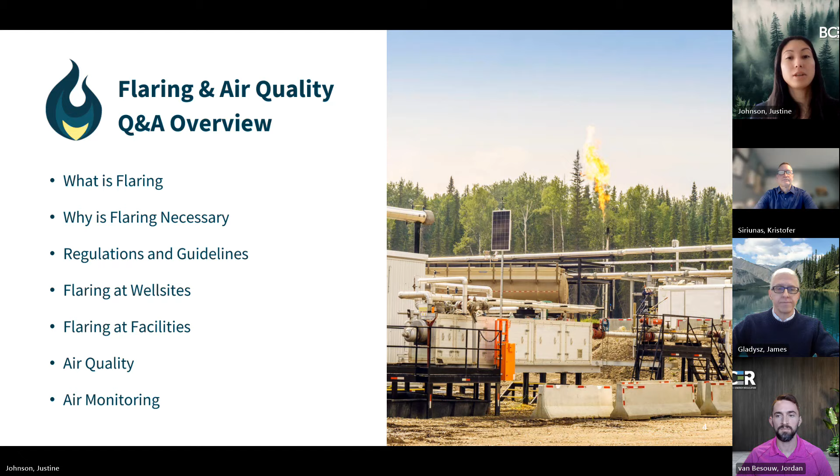So to get us started, the first question is, what is flaring? So flaring is just the controlled burning of a waste gas stream that cannot be processed or otherwise sold or used. It typically ends up as a result of non-routine situations such as maintenance activities or process upsets at a well or facility. The waste gas is ignited at the end of a long metal pipe with engineered components known as the flare stack. And it's this ignition at the end of the flare stack that causes the characteristic flame that is associated with flaring.

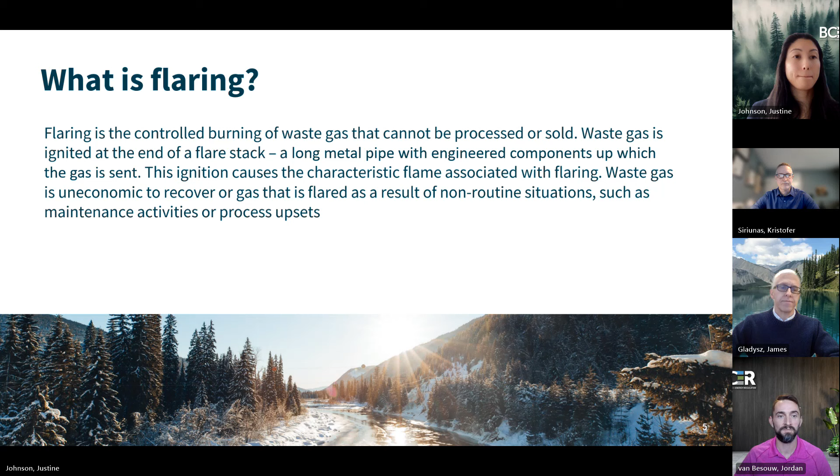And why is flaring necessary? Fundamentally, it's a safety measure. It's used to dispose of a waste gas stream at a facility if there's a facility upset, as one example, and doing this prevents a situation from turning into a bona fide emergency. It's also better than releasing the gas to the atmosphere directly, known as venting, because it results in fewer greenhouse gas emissions and reduced pollution compared to venting. Fundamentally, it's a safe way to destruct natural gas and other hydrocarbons at well and facility sites.

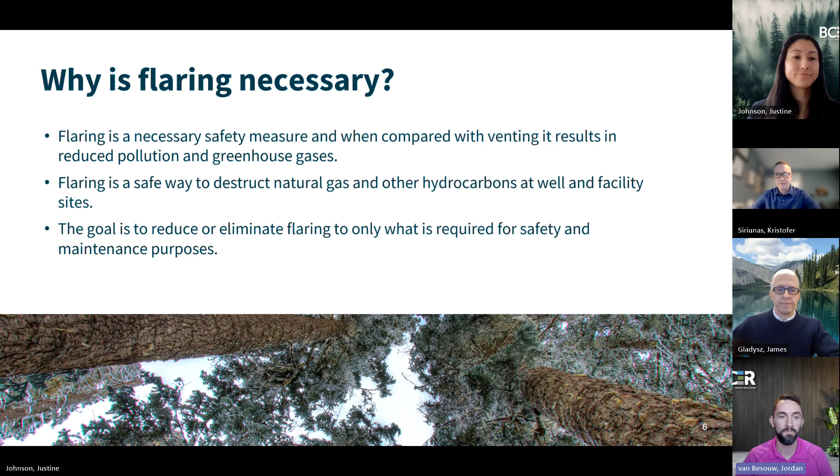How does the BCER regulate flaring emissions? The BCER regulates the entire life cycle of oil and gas, methanol, hydrogen, and geothermal activities through the Energy Resource Activities Act. There are a number of regulations under ERAA that document the requirements for flaring. The Drilling and Production Regulation is for wells and includes drilling, completions, and operations. The Oil and Gas Processing Facilities Regulation is for gas plants, refineries, and manufacturing plants that convert natural gas to other products. The Liquefied Natural Gas Facility Regulation is for LNG facilities for both domestic and export-based projects.

For larger projects, such as LNG plants, gas plants, compressor stations, there is a specified enactment in ERAA that gives the BCER authority to grant waste discharge authorizations or permits under the Environmental Management Act. If a flare stack was authorized under an EMA permit, then the BCER can impose conditions on flaring, such as restrictions on flow rates and emissions, and reporting requirements.

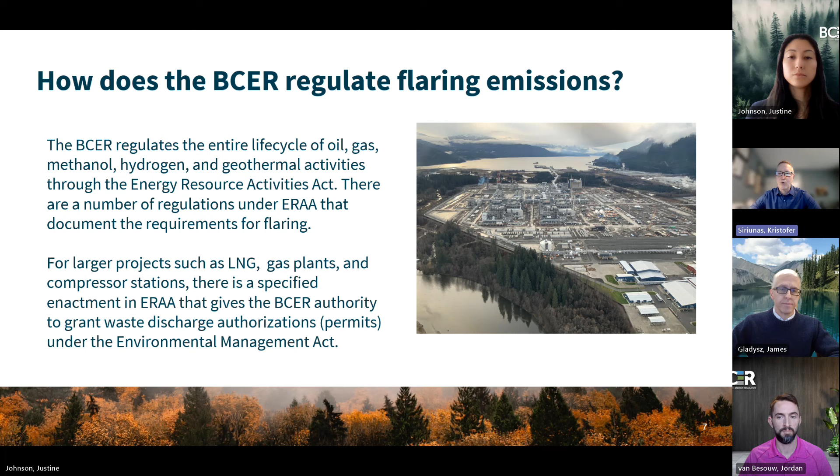Are there requirements in place to ensure flaring is done safely? Yes, in BC, we have a number of requirements in place to ensure flaring is carried out in a safe manner. First of all, the flare system design and operations are required to have adequate oversight by a professional engineer registered with Engineers and Geoscientists BC. Second, industry is accountable to have trained personnel regularly monitor ongoing flaring activities to ensure compliance with regulations. These requirements, combined with risk-based BCER site inspections and facility integrity management audits, provide a level of safety related to flaring.

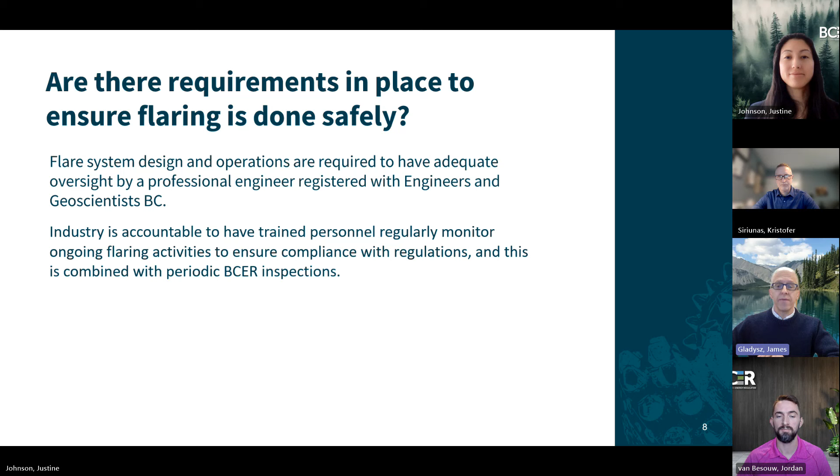The BCER also issues site-specific air discharge permits under the Environmental Management Act for large oil and gas and liquefied natural gas facility operations. Each permit contains requirements for limiting the release of air contaminants such as sulfur dioxide, nitrogen oxides, and carbon monoxide. Requirements to limit air contaminants for smaller operations are specified in the Oil and Gas Waste Regulation and the Drilling and Production Regulation.

And what resources are available for industry? Yes, Chris listed the various regulations in a previous slide that apply to activities where flaring may take place. We also have a dedicated published guideline on our website called the Flaring and Venting Reduction Guideline that describes in detail the regulatory requirements for all types of flaring and how those requirements can be met. There are decision trees within the guideline outlining when flaring is appropriate and where other measures to conserve natural gas are to be taken.

When can permit holders flare at a well? It's a good question. The regulation contemplates a couple of different situations where a permit holder might be able to flare at a well. The first is that they may flare at a well if it's required for emergency purposes or for drilling operations. So for instance, if while drilling an overpressured formation is encountered, the permit holder might flare that gas off when it's circulated to surface to dispose of it safely. They may also flare intentionally at a well that's being drilled underbalanced.

A second situation where permit holders can flare is at a well, but for workover or maintenance purposes, limited to no more than 50,000 cubic meters of gas per year. So for instance, they may flare gas for a very short period of time when unloading a well with nitrogen prior to returning the well to regular production.

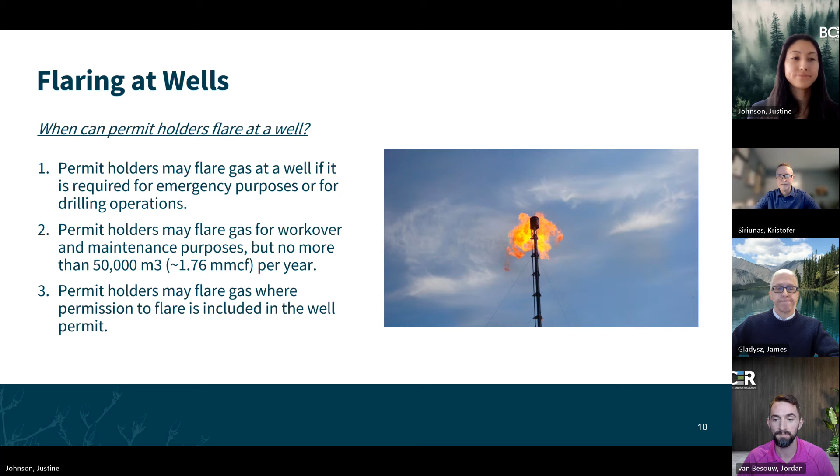Do facilities always need to have a flare? Yeah, this is a question we often receive. Facilities do not always require a flare system. The decision to include a flare system in a facility design is made by the permit holder based on a combination of the risks associated with the actual specific facility and the regulatory requirements for safe operation. For example, if sour gas is handled at a facility and there is also compression or dehydration equipment in place, a flare system is typically required to safely burn the sour gas emitted in both routine and non-routine scenarios. And all proposed designs are reviewed by BCER engineering staff to ensure compliance with the regulations for safe operation.

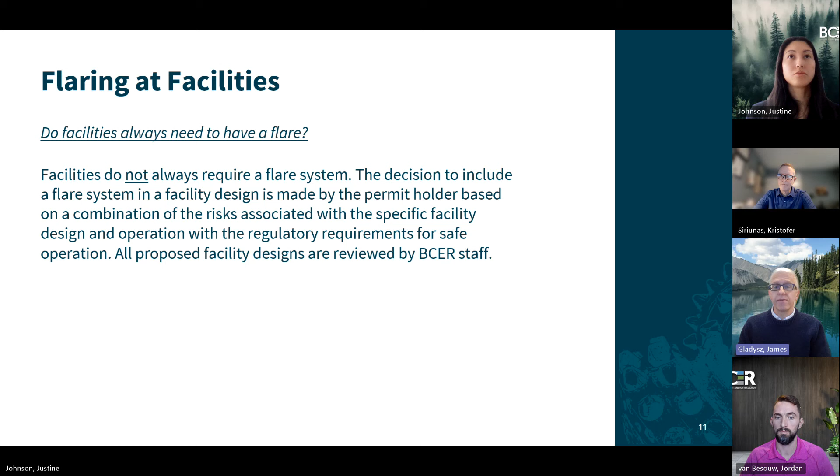What alternatives are there to flaring? Yes, there are a number of alternatives, and we'll discuss three of those here today for facilities. The first option is to not include a flare system in the facility design. Small-scale facilities, such as those at well sites, often do not require flare systems where the design and equipment are simplified, and there's a very low risk of an unplanned product release. A second option is incineration. This is sometimes used to burn a continuous low-pressure gas waste stream and eliminate a visible flame, but requires a significant volume of additional fuel gas to operate, making it often costly and inefficient.

A third option is to capture and recover waste gas volumes with dedicated compression equipment. This is the most favorable method to reduce flaring at larger facilities and has become a standard in all of our new gas plant designs. Also, many older facilities have been retrofitted with vapor recovery units to reduce flaring.

What does proper combustion at a flare stack look like? Is visible flame okay? Safe and sufficient combustion at a flare stack takes place when there is adequate airflow mixed with the waste product to be burned. And the result is a flame that is visible and usually bright yellow-orange in color. And there should be very little or no visible plume beyond the flame. Many flare systems are equipped with a continuous small pilot flame, which again would be visible, which helps ensure waste gases are reliably combusted when required.

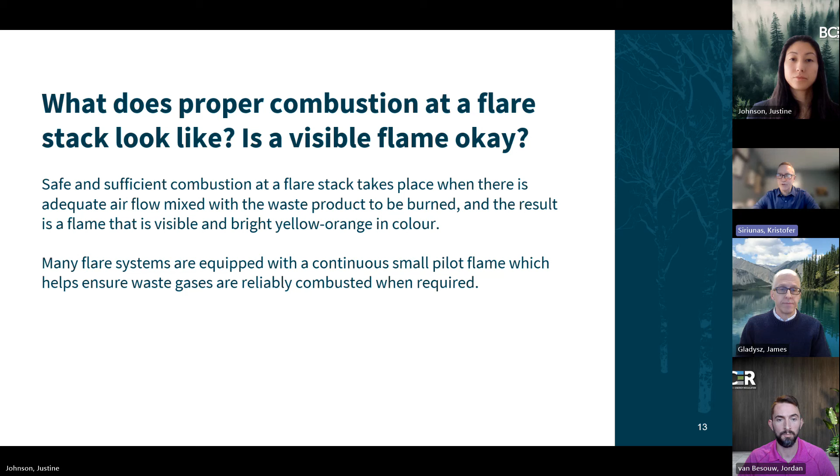What about black smoke? Is it a problem? Black smoke results from poor combustion, and it can contain particulate matter, unburned hydrocarbons, and other products of incomplete combustion, such as polycyclic aromatic hydrocarbons, or PAHs for short. BCER regulations require permit holders to design facilities to ensure good combustion whilst flaring. Black smoke can be reduced from flares by adjusting the operating characteristics or by modifying the design of the flare system. Air, gas, or steam-assisted flares are currently used at some of the larger gas processing plants and LNG plants to improve combustion efficiency.

The Oil and Gas Processing Facility Regulation requires permit holders to ensure there is no black smoke during routine flaring and minimal black smoke during non-routine flaring. Minimal black smoke is defined as periods not to exceed a total of 5 minutes during any 2 consecutive hours. The Drilling and Production Regulation has a similar requirement. If black smoke is observed at a flare, the operator and/or the BCER should be notified so that potential corrective action can be taken.

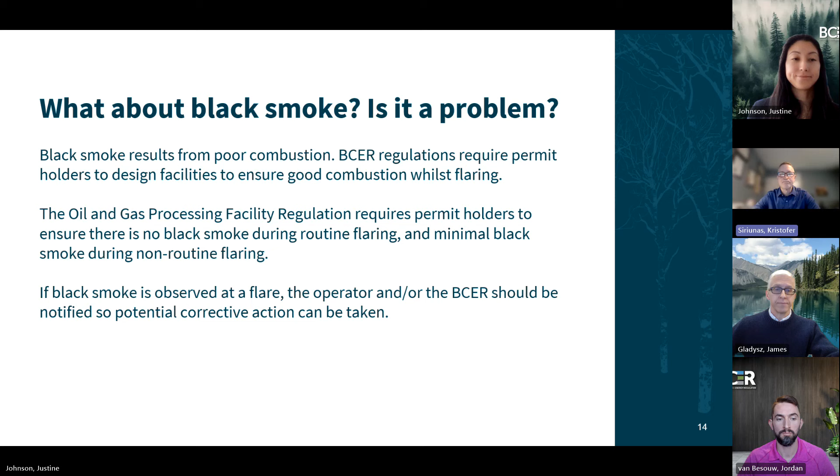And what about these examples? The example on the left, again, is not ideal. If indicative of the entire event, compliance and enforcement action may be in order, but depending on the circumstances. The figure on the right shows a slight gray visible plume beyond the flame. And although it is likely not a serious issue, we would need more information on the event to properly judge it.

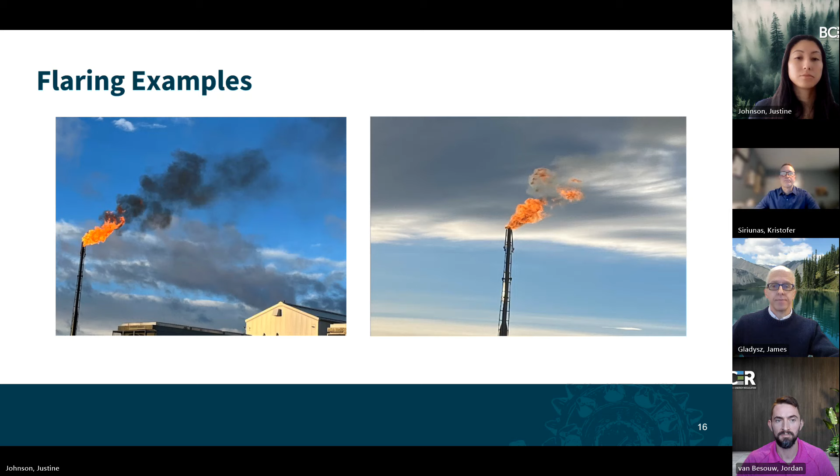How are flare emissions measured? Yes, flared gas volumes are recorded using specialized measurement equipment at facilities and during the testing of wells where there is a continuous flow of gas to the flare system. These volumes are reported to the BCER along with all routine and non-routine flare events that exceed a specific volume stated in regulation.

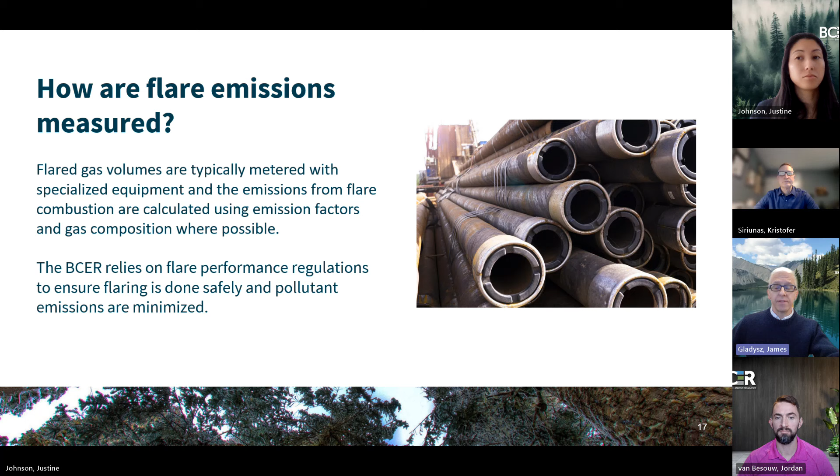The emissions from flare combustion are more challenging to measure and are calculated using emission factors and gas composition where possible. Innovative camera designs are also used by industry and the BCER to monitor flare emissions at a point in time to check flare performance and efficiency. The BCER relies on flare performance regulations to ensure flaring is done safely and pollutant emissions are minimized.

How does the BCER monitor the impacts from flaring in the environment? The BCER has 2 main ambient air quality monitoring units. The Continuous Air Monitoring Environmental Laboratory, or CAMEL, that you can see in action in the picture on the slide. And we also have the Roaming Air Monitor, or RAM. The CAMEL is a trailer, as you can see there, containing the equipment to continuously monitor a wide range of air pollutants and meteorology. It is designed for long-term deployments from months to years.

The RAM is a specially designed van housing equipment to continuously monitor air pollutants while driven or parked. It serves as a quick response unit for emergencies, but also can be used for other short-term ambient monitoring deployments when not in emergency service. For example, the RAM was recently deployed to Kitimat for the commissioning of LNG Canada. It is important to note that the gas analyzers are interchangeable between the CAMEL and the RAM, allowing flexibility when preparing deployments.

We also have 2 portable air monitors the size of small suitcases that can be quickly deployed in response to incidents and complaints. In addition to our monitoring capability, there are 14 continuous ambient air monitoring stations in northeastern BC, measuring a wide suite of pollutants, some of which are located where oil and gas activity is prevalent. The monitors are either run by the province or by industry as a condition of their permits under the Environmental Management Act.

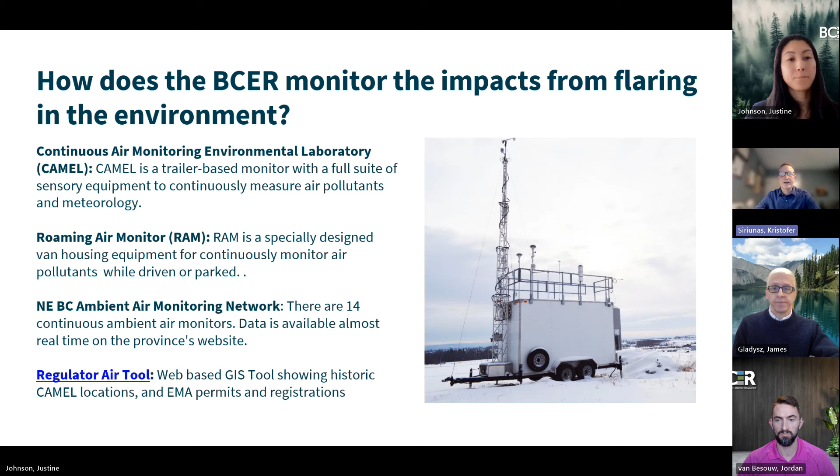What factors affect a flare's performance? A flare's performance will depend on a number of factors. The first one I'd like to talk about is gas composition. The more light hydrocarbons, such as methane and ethane, that are in the gas, the more likely a better performing flare is. Heating value of the gas is related to gas composition. Low heating values usually indicate higher compositions of inert gases, such as carbon dioxide or nitrogen. Lower heating values can lead to poorer performing flares.

Exit velocities are another factor that can affect the flare's performance. Flares should be designed to handle the expected flow rates. Under-designed flares, where the diameter is too small, can lead to noise problems from higher exit velocities, while over-designed flare stacks, where the diameter is too big, can lead to poorer performing flares from exit velocities that are too low. Meteorology can also affect a flare's performance, and this is related to exit velocities. High wind speeds can decrease flare performance, especially under low exit velocities.

And finally, flare tip design. Combustion is very complex, and flares need to be designed for the expected gas compositions and flow rates. Air, gas, and steam-assisted flares can be utilized to improve combustion, and these are usually found at larger plants, gas processing plants, and LNG facilities.

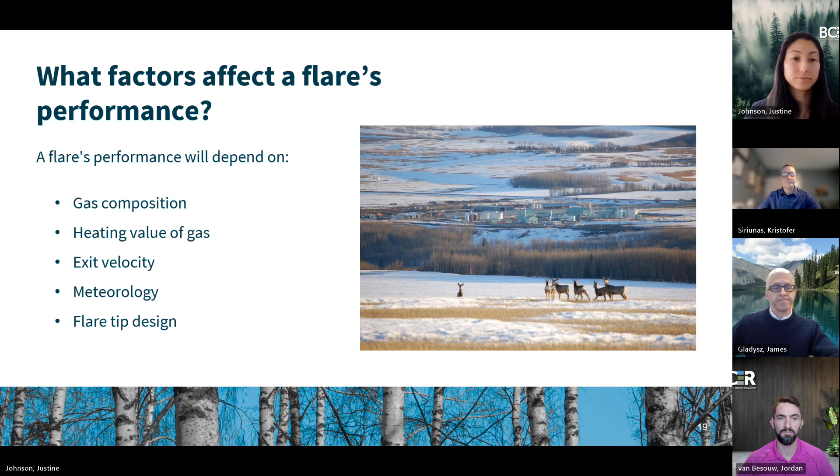What exactly is emitted from flares? Flaring is a form of combustion, and as such, emissions from flaring are similar to any combustion source. Flaring will mainly emit water vapor and carbon dioxide, and trace amounts of other pollutants like oxides of nitrogen and carbon monoxide will also be emitted. If the gas being burned contains sulfur compounds like hydrogen sulfide, then sulfur dioxide will be emitted. As well, unburnt gas, particulate matter, and PAHs, as I spoke of earlier, can also be emitted, and the amounts will be dependent on the performance of a flare.

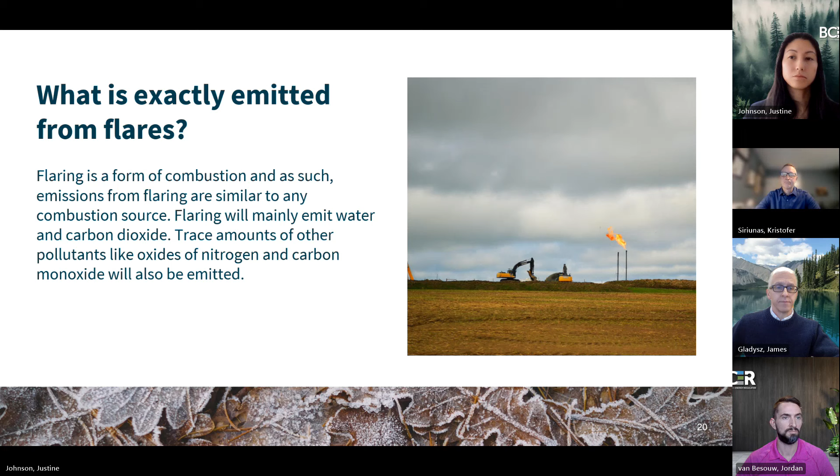What about flaring sour gas? Is it a risk to the public? Sour gas is defined by the hydrogen sulfide content of the gas. When H2S is combusted, it is oxidized to sulfur dioxide. At the design phase of a facility, air dispersion modeling is typically done, usually for the main hazard, sulfur dioxide, when the H2S content is greater than 1%. This is to ensure that potential flare emissions will not be harmful to people or the environment. Temporary flaring at well sites, for example during well cleanup and testing, is assessed similarly, with dispersion modeling requirements kicking in at that 1% H2S content.

To manage risks to the public, the regulations state that where a facility could flare sweet or sour gas and does not have on-site personnel supervision 24 hours a day, the design must include an adequate auto-ignition system. This ensures that gas flowing from a flare stack is always being safely burned. In addition, for sweet gas flaring, the flare stack is required to have a continuous monitoring device that detects the presence of a flame, or the flare is inspected at least every 7 days. For continuous flaring of sour gas, a flameout detection device must be installed on the flare stack with the capability of shutting down the facility and providing an immediate alarm to the permit holder.

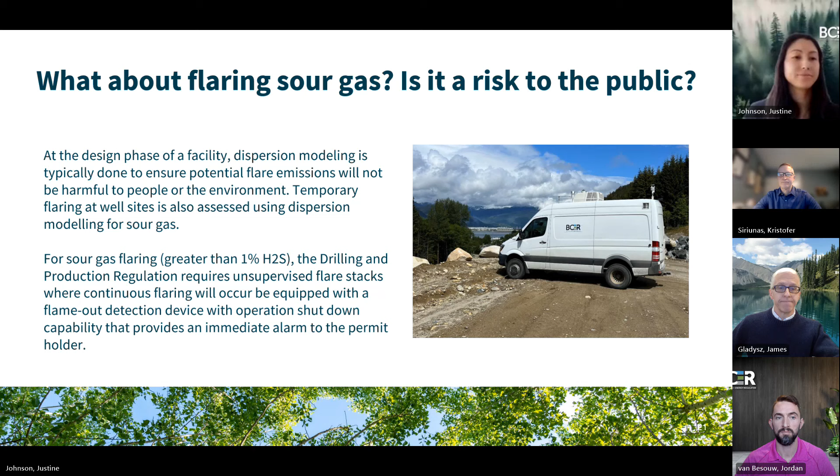And lastly, how does the BCER know emissions from a flare stack are safe? Safe isn't a technical measurement, and it can mean different things to different people. In our view, permit holders are required to design and operate their wells and facilities in accordance with BCER regulations and other applicable codes and standards, as well as guidance from us. And that includes specific equipment, such as flares.

The BCER uses the design phase review, inspections, compliance and enforcement endeavors to ensure permit holders are following the intent of the regulations. In instances where permit holders are non-compliant with our regulations, the BCER can enforce penalties and require permit holders to come into compliance with regulations before continuing operations. Where the design and operation of a facility meets or exceeds the regulatory requirements, the BCER would consider the risk associated with these operations to be as low as reasonably practicable.